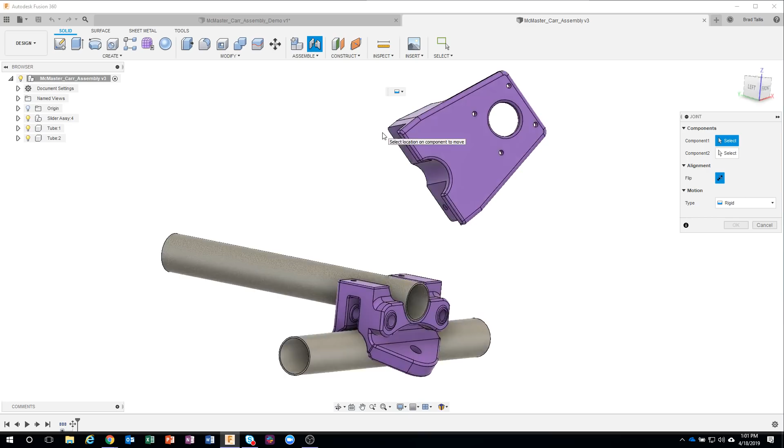So I'm going to go ahead and use the Assemble menu, and let's create a joint. I'm just going to zoom up and click on this edge here, and this circular edge right here.

Now I want to be really careful. You'll notice when I'm hovering over this edge, it's selecting the whole edge, but sometimes you'll get where there's an end point, and I do not want it to catch right there. I want it to catch in the center. So you'll notice that I've zoomed up on this area, and when you're positioning parts, I highly recommend that you zoom up so you can kind of see what's going on.

So I'm going to go ahead and click that edge, and it's going to bring that part and line up those holes. You'll notice that it's using a rigid motion type. It lined those up, but now I want to go ahead and line up this hole with this hole over here, so I'm going to go ahead and say okay.

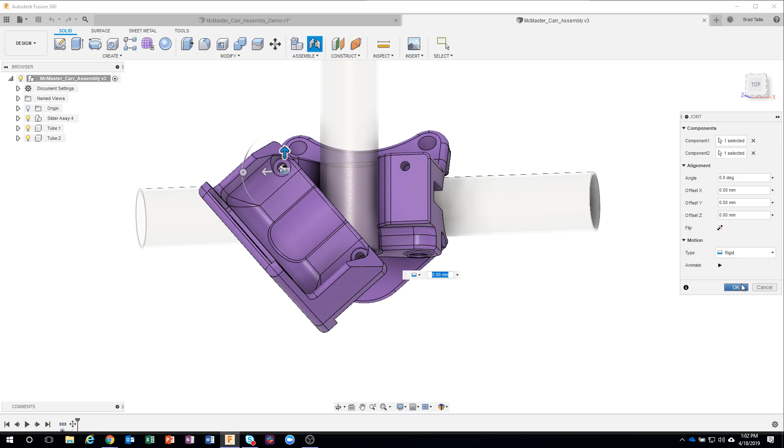We'll use the joint command again. This time I'm going to say this edge, again making sure I grab the correct edge right there, and then I'll go ahead and select this edge here. Now you'll notice I get a warning that says a joint already exists between the selected components. Do you want to continue?

This is what I really wanted to point out, because a lot of people think, oh, you can only have one joint, and that's not true. You can actually have more than one. So yes, I want to continue.

However, you'll see that it goes ahead and lines up that joint, but I get a warning that says the selected joint type would result in a conflict. I'm going to go ahead and say okay. Sure enough, you can see down in my timeline, here's my first joint that I created, the rigid joint, and then here's the second rigid joint, and it's highlighted yellow saying that it can't do that.

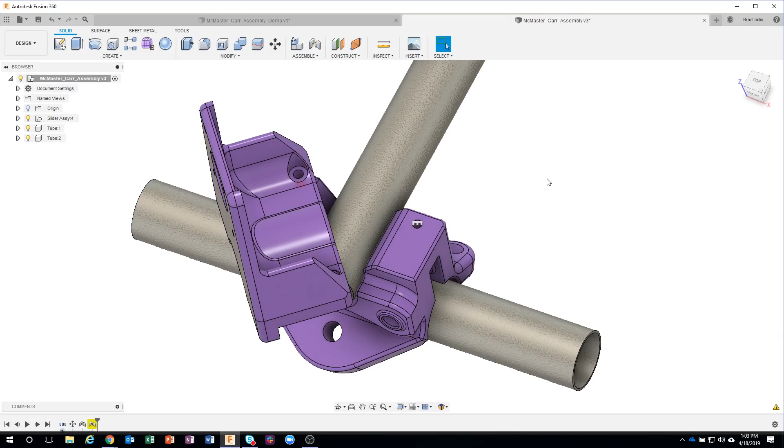So how do we go about positioning this correctly? Well, the issue is the fact that I'm using rigid joints, and if you look at this, if this is lined up right here, we basically want to rotate this part around to line up these other holes.

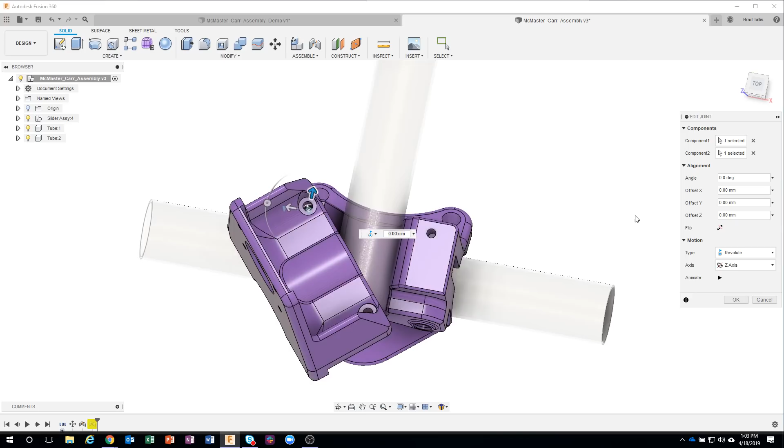So let's go back and edit this joint type, and instead of making it rigid, let's change it to revolute, and you'll see that it's going to revolve around that particular axis, and I'll say okay. Now it's still complaining at me, but it's now able to rotate around this hole.

Well, let's do the exact same thing over here. We want it to be able to rotate around that hole. So I'm going to come in here, and you can see when I edit this joint, it's kind of off at an angle, and it thinks, oh, I need to be rigid or glued in place or welded in place. Well, we want it to be able to rotate to get this hole to line up with the first hole. So instead of rigid, I'm going to change it to revolute.

We get the little preview, and now when I say okay, we can actually see that that worked. Now I know it was kind of different, but the key thing there is you can actually have more than one joint on a particular component.

Again, it kind of depends on what kind of joints you're doing, but in this case, the default was rigid and it was giving me some conflicts. So I went back and just made it so we could rotate that part to fit exactly on that other component. Hopefully this tip will help you in the future. I thought this was a good example to show. I know we're going to talk about McMaster-Carr parts, but I just wanted to go ahead and position that in the correct location.

Okay, so what we're going to do now is I want to show how this thing's going to get assembled. You can kind of see we've got some bearings, we've got some bolts, and we've got some nylock nuts on here. And instead of modeling these myself or going out and finding where to download them, maybe off of something like GrabCAD, we have built right into Fusion the ability to insert a McMaster-Carr component.

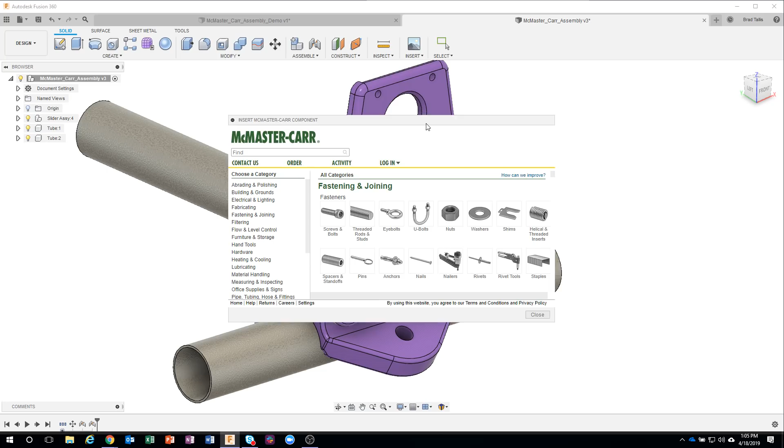So you'll notice I'm in the Insert menu right now, and in there is Insert McMaster-Carr. I'm going to go ahead and click on that. It brings up our McMaster-Carr window, and you can see all of the different categories. I'm going to make this a little bit larger, so I'm going to stretch this over.

So you can see screws and bolts, threaded rods, U-bolts, nuts and washers. I mean, there's pretty much anything you can think of in here.

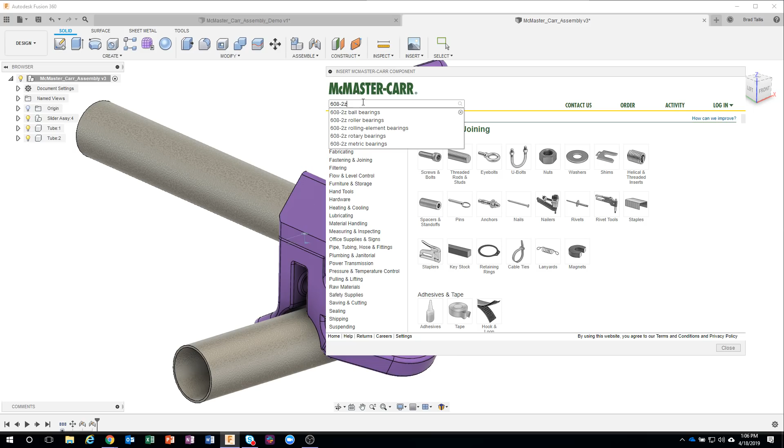So for example, I know that I need to use a 608-2Z, like a skateboard bearing, for this. So I'm going to do a search for 608-2Z. And sure enough, as I'm typing that in, you can see it comes up with a whole bunch of different options here. I'm just going to go ahead and hit enter.

And what it does, and this is my favorite part, you're going to see us use this section quite a bit, but it shows all of the different kinds of bearings that McMaster-Carr has. And there's quite a few of them.

So what I like to do is filter down the design. In my case, I want to use sealed bearings, so I'm going to click on sealed, and now you'll notice it's filtered those down. Then we can also see we have other options here, like precision ball bearings, stainless steel ball bearings, etc.

Now the thing you want to do is you'll notice, and it's kind of hard to see, but there's usually going to be a product number, and it's kind of highlighted in blue. So we can see this 5972. I'm just going to go ahead and click on that link.

And what this does is, if you see this little CAD symbol, that means that McMaster-Carr has a CAD drawing or a 3D model of this particular product. So I'm going to just click on that. Now I get a lot more information - what's the shaft diameter, the inner diameter, outer diameter, etc. So you can kind of see all of this information.

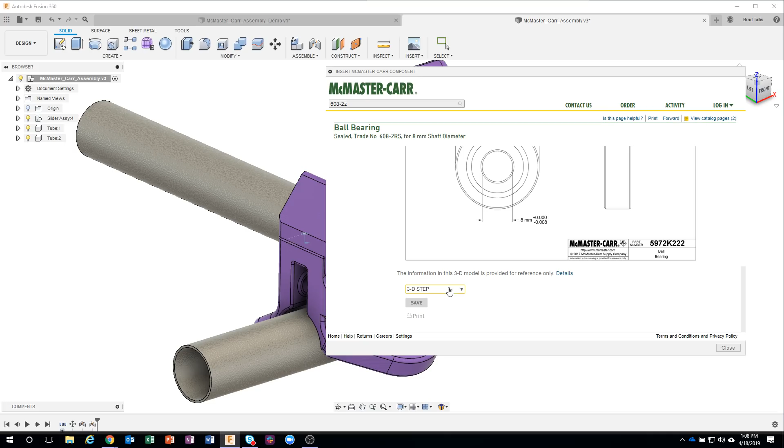But as I keep scrolling down, we're going to see the drawing for it. And then finally you'll see this little pull down. I'm going to scroll down a little bit more, and you can see that they have 3D models and 2D technical drawings.

And all you have to do is pick one of these options. Now, I personally like to use 3D Step, so I'm going to click on 3D Step and say Save.

Now, you'll notice how quickly it brought that into our session. This is an actual 3D model. If I zoom up on this - now I could have drawn this by hand, but it would have taken me some time, I'd have to research everything, etc. But here I'm able to just go to McMaster-Carr's webpage and bring it right in.

Now it came in a kind of an odd orientation. It's like horizontal and it's not where I want it to go, but I'm just going to go ahead and say OK.

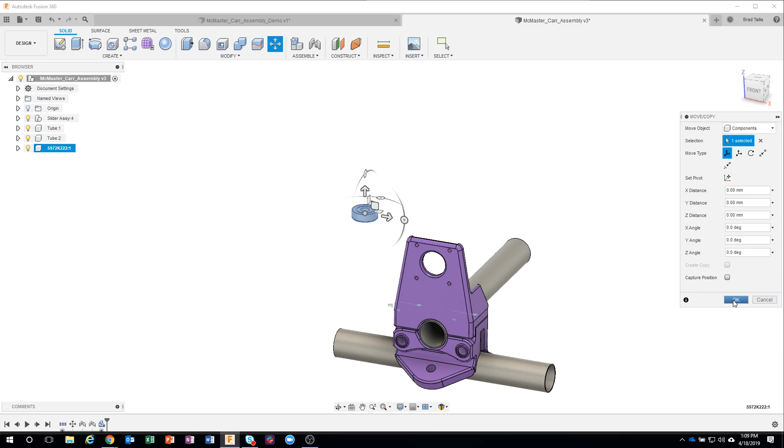Now I want this bearing to sit on this little bearing race right here, so I'm going to use the Assemble menu, and we're going to use the Joint command.

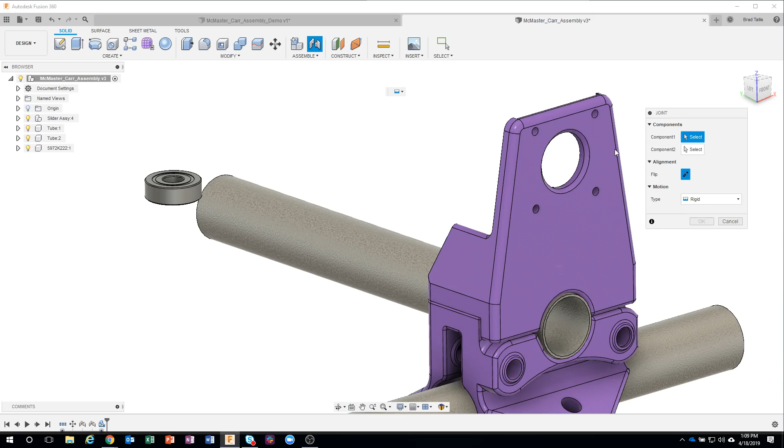I talk a lot about the difference between bodies and components, and one of the tips I use myself is which one's component 1 and which one's component 2. I've come up with a little saying that helps me: which one do I want to move, and where do I want to move it to. That's how I remember.

So this is the one I want to move, and I want to move it to over here. I'm going to zoom up here, and I'm just going to pick, for example, this edge. It can be any of these edges. So I'll click on that edge there. That's the one I want to move.

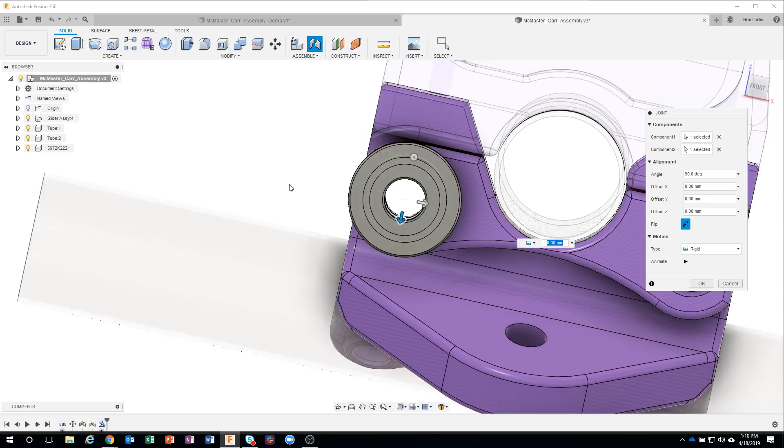And I want to move it to, for example, this edge here. It's going to move that bearing, and you'll see it positioned it exactly where I wanted it. It's axially lined up in the correct axis, and it's sitting on that particular little face. It's kind of hard to see through there.

Now, if for any reason it came in looking like this, where it positioned it in the right axis but it's clashing through the part, you can flip the orientation using this little flip icon right here. So I just used McMaster-Carr to bring in that bearing, and then I've positioned it where I want it on that part.

So the next thing I want to do is copy this because I want to put another bearing right inside of here. Now I could go into McMaster-Carr and search for it again, but I know this is the correct bearing. In fact, I could even come in here and rename this. I'll just call it bearing.

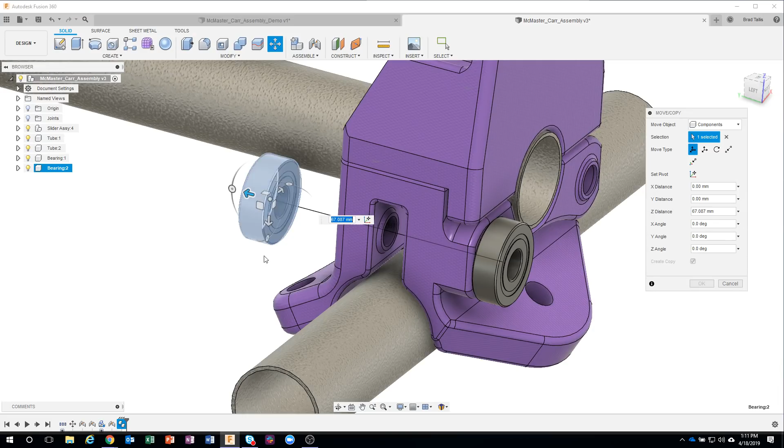Let's just say move copy. And when I do move copy, one of the first things I want to do is make sure I check create copy. Then I'm just going to drag this out in space somewhere. I don't really care where, I'm just getting it out of the way. And I'll say okay, I now have bearing 1 and bearing 2.

Let's go ahead and create a joint to put this in the correct location. I'm going to say that edge there and this edge here. Now again, notice I'm accidentally hovering over that edge and it's catching that point, and I do not want that. I'm going to move down the edge a little bit until I get the actual edge, and you can see that little smiley face in the middle.

That's what's called a joint origin, and it's going to line up the center of the bearing with the center of that one there. So we can see how it moved that bearing over, and it's now lined up axially.

I'll say okay. Now here's another thing: I could make these revolute and actually have them spin around, but you need to think about whether you're going to actually show that, or if this is just more like positioning. I just want to get this part from point A to point B, and that's where it's going to be. I could make it revolute, but in this case I'm just going to leave it rigid. I just want all of these things to move together. The cool thing is, if I make them rigid, I can always come back and change them to revolute if I need to. We'll say okay, and now I have that bearing there and that bearing there.

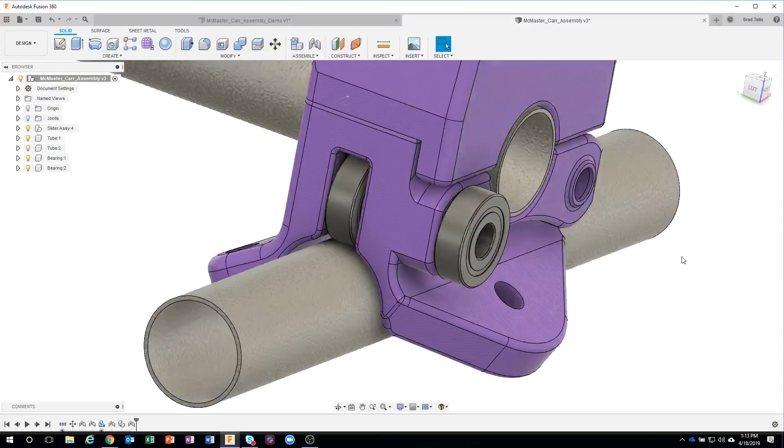Okay, so the next thing we want to do is somehow hold these bearings in place. So we're going to go out and search for a metric 8 by 60 bolt.

Okay, so let's come over here. We'll go back into the insert command and say insert McMaster-Carr component. I like to make this a little bit bigger just so I can see more of what's going on. So instead of typing in or searching for it, I'm going to go through this menu here. I'll click on screws and bolts, and you can see all the different options for the different kinds of screws and bolts. In this case, I'm going to do a hex head.

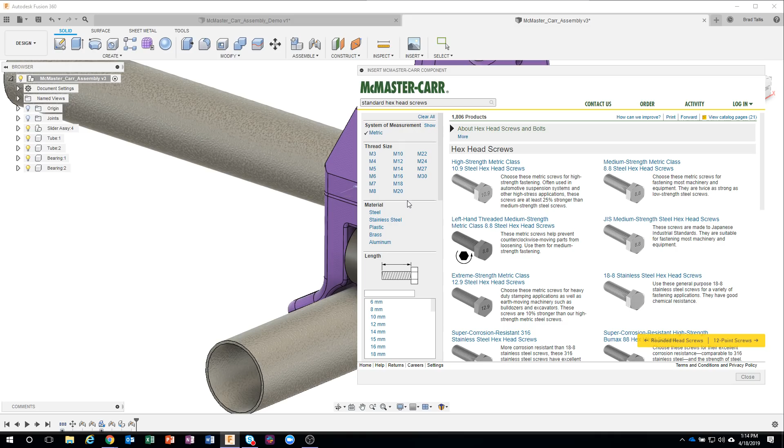And again, I think this is so cool. I said I want a metric 8, so I'll just start at the top and say I want metric, and it filters everything out, showing me all my options for the metric hex head screws. So let's pick metric 8, and now we're filtering for metric 8.

Maybe I want stainless steel. And I know the length I want, so I can drag this down a little bit, it's 60, so I'll say 60. Then you can also see we have the option of fully threaded or partially threaded, so I'll say partially threaded. It's literally filtered me down to one option. Instead of going through a whole bunch of tables, it's showing me here's a metric 8 stainless steel, 60 millimeter long, partially threaded hex head screw.

So again, I see this little CAD symbol, I can click on that. Just like before, it shows a drawing, a little rendering of it. It remembers my last option, which was step. So I'm just going to click on save.

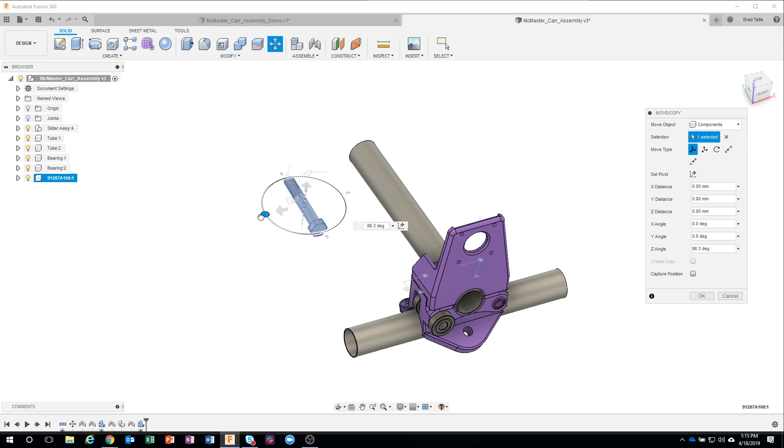It takes a moment to come in, and again it puts it up in space somewhere. Now if you want to, you could rotate it so it's more in the direction you want. In fact, I'll go ahead and do that just for fun. Then maybe I could even position it closer to where it needs to go. However, we're going to use the joint command to make sure it gets put in the exact correct location, but you can drag it around if you want to. So I'll just say OK, and there we are.

So let's go ahead, I'm going to capture my position and create a joint.

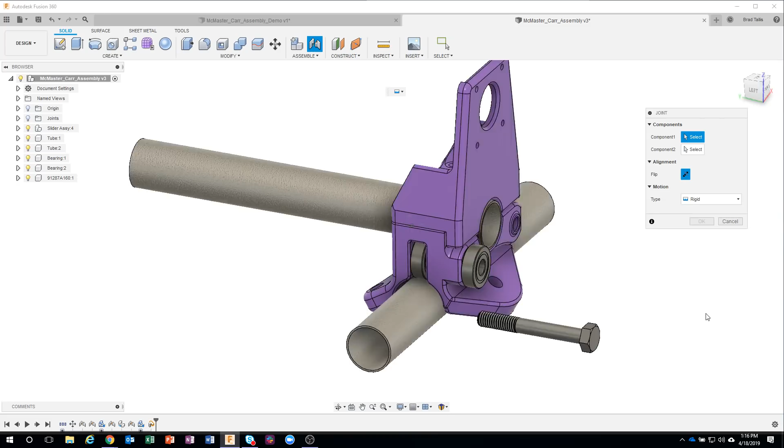So I'm going to zoom up on this head right here, and you're going to see a couple options. If I hover over this face, you'll see a lot of these little tick marks - round ones for the ends of a line, triangular ones for the middle of a line. It's kind of hard to not move my mouse because it wants to snap to it, but you can see the triangles in the middle. And then you'll see a little plus symbol in the very center of the shaft of the bolt - that's the exact center of that axis. So that's if I hover over this face.

If I get near this edge, you'll see it automatically snaps to the center of that edge. I personally like to use this one because to me it's confirmation that it's actually grabbing the center of that edge, and we also know that edge is planar on that face. So it's basically grabbing the center of that and the center of that plane.

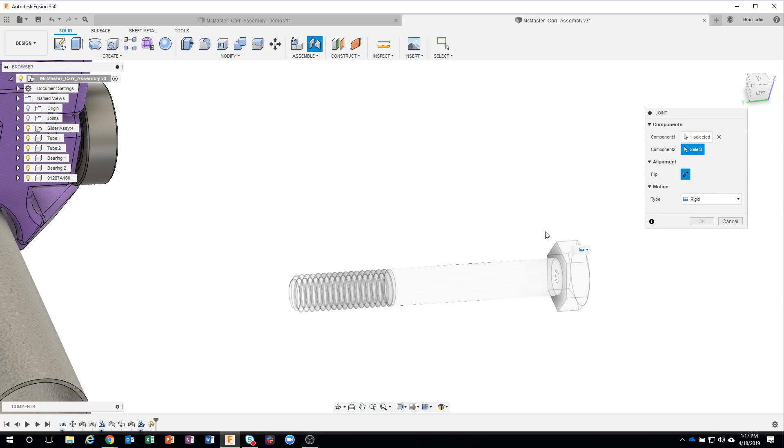So this is the one I want to move. And where do I want to move it to? Well, I want to move it to this bearing over here. So again, I'm going to hover over that edge and click, and it's going to move that bolt into the correct location.

Again, I could hit play. You can see it's showing that it's rigid in this case. Pretty much like I said before, I'm going to leave everything rigid for now. So we just positioned that screw where it needs to be.

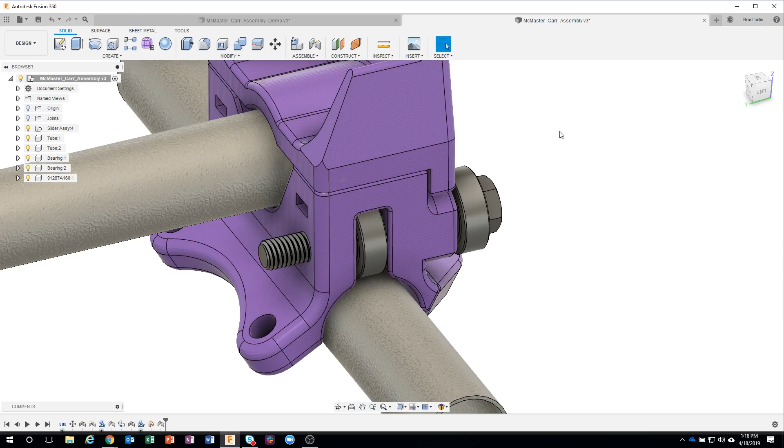Okay, so the next thing I want to do is put one of those nylock nuts on the back. So again, I'll come into the Insert McMaster-Carr component. I'll stretch this out a little bit, and this time I'm going to click on the nut icon. I want to do some kind of a lock nut, so I'll click on lock nut. But again, notice all the different options in here - you should hardly ever have to draw anything hardware related. I would definitely come out to McMaster-Carr first and see if it's in there.

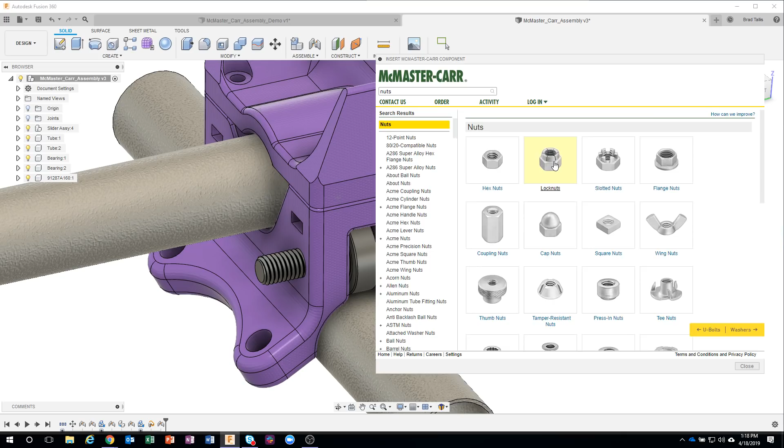So I'm going to click on lock nuts, and again I have some different types here. So I'm going to do this lock nut. I know I want a metric 8, so I'll filter through and say metric 8.

I'm going to go ahead and keep it stainless steel. So let's do the stainless steel, and you can kind of see it filters it out. It gives me a couple different options here, but I'll just use this very first one. I'll click on this little link. I see the little CAD icon, so I can click on that product detail. It shows me everything I want to know about it, which is kind of nice. And I'll click on save.

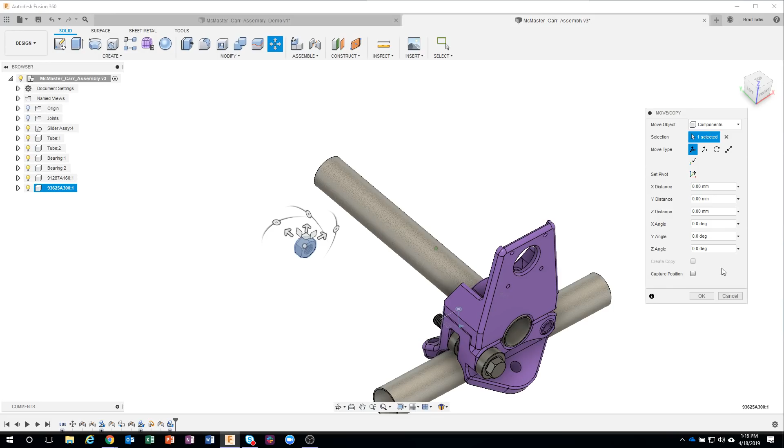Now, last time I kind of moved it around. This time I'm just going to leave it. I'm just going to go ahead and say OK, and it's just out there in space.

And we'll do the joint command again. So I'll say joint, and I'm going to zoom up a little bit. Now here you'll notice, because this is kind of threaded, it kind of cuts the circle in half. Now it's still showing me the center of that circle, but in this case I'm going to hover over this face, and you can see all of the options that it's giving me.

So I can catch to these midpoints if I want to, but I can also catch to this particular little plus symbol. Now, I covered this again in my parts and assemblies live stream that I did, which we'll link to. But as you're moving around, you'll see it's going to try and snap to all these other faces and edges, and it can get really confusing really quick.

Okay, so here's a tip. You hover over what you want, and you want to control your selection. So on a PC, I'm just going to hold down my control key. And now when I move my mouse, you'll notice it's not catching any other edges or faces because I'm controlling my selection. As soon as I let go of control, you can see it's back to trying to snap to everything else. But if I hover over what I want and hold down control, I'm now controlling my selection. So I can very easily click on that little icon.

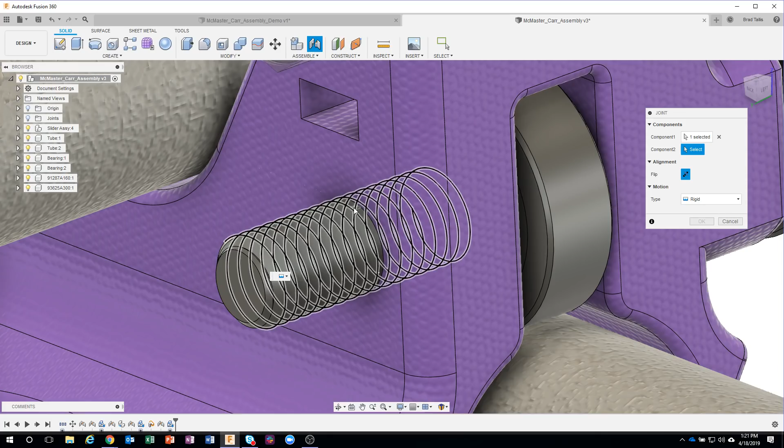And I'll come over here, and I'm going to zoom up again. Now here's another thing. You'll notice I could hover over this face and catch to that little center. I could hover over this edge and catch to the center. But I need to be really careful because if I start to move, I'm going to get a bunch of other things. So again, I really like the fact that I can hold down my control key to control my selection. So I'm going to click that little icon, and it's going to move the nut in place. I'll say OK, and we've now created basically this subassembly.

Now, if I go ahead and try and move this bearing, you'll see that the whole thing moves because we basically attached it, made it rigid with this purple part. And that's going to come into play here in just a moment.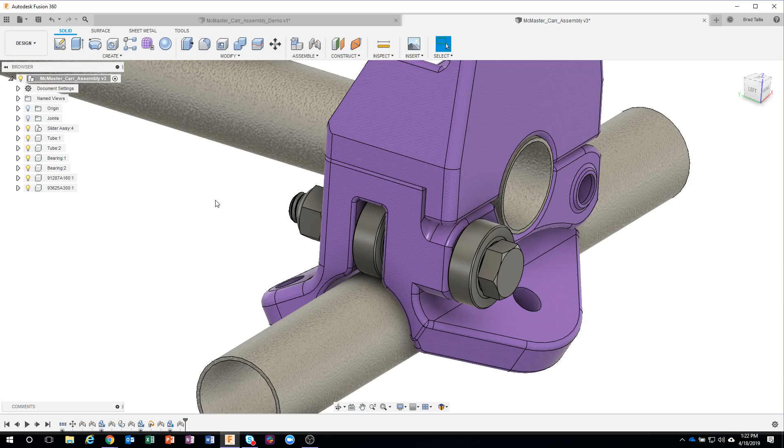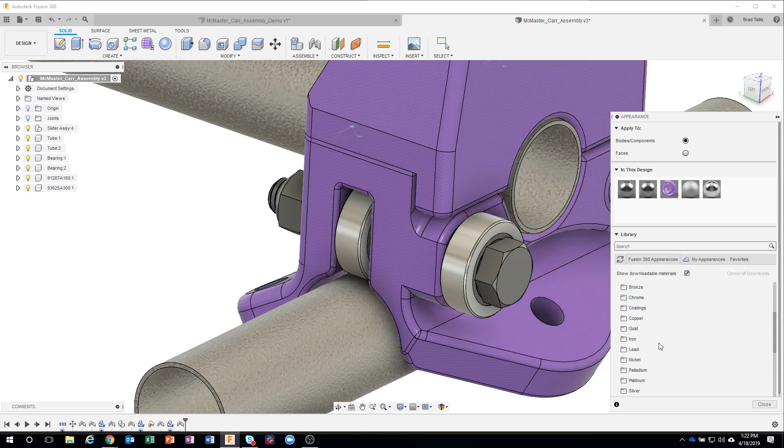I like to change the appearance, so let's go ahead and hit A for appearance, and let's make these aluminum bearings. I'm just going to drag aluminum onto the bearing. You can kind of see what that looks like. Maybe we want to do stainless steel because that's what we picked, so I'm going to say stainless. And then we could do maybe a polished stainless steel if you want to, or a satin—it's really up to you. But I went ahead and just added some appearance to that to make it look a little bit more realistic. In fact, you can kind of see the galvanized pipe that I'm using.

Okay, now I need to do the exact same thing over here. Well, let's save some time—instead of bringing everything back in again, we're going to reuse this. And to do that, I want to organize this basically into a subassembly.

So you can see that we have this bearing, we have another bearing, and then I'm just going to rename this metric 8_60 bolt, so we kind of know what that is. And then we know that this is a metric 8 nut, let's just say. Again, I could have left the part numbers in there if I wanted to, but I like to rename these so I can kind of see what they look like, what they are.

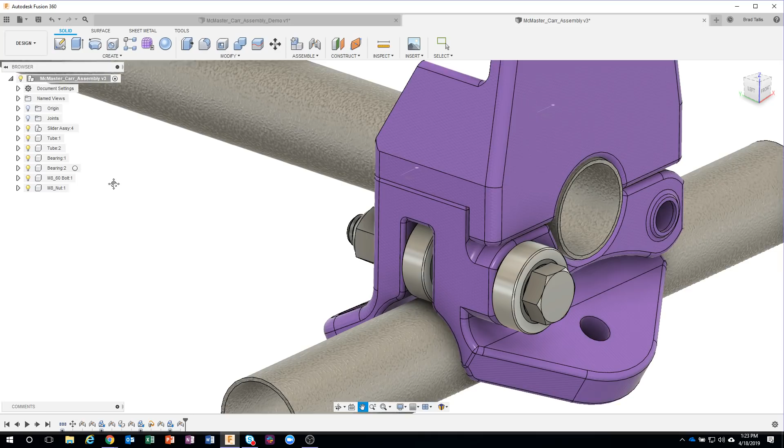Okay, here's a neat little trick. We can see I'm at my top level assembly right now. I'm just going to right mouse click and say new component, and it's going to create a new component underneath that. And I can rename this—in fact, I'm going to call this bearing assembly.

Let's just call it bearing assembly. I'm going to drag this bearing, the second bearing, the nut, and the bolt into that bearing assembly. Now you'll notice the icons changed a little bit, showing that there are multiple components underneath this bearing assembly.

Hopefully that makes sense. I'm going to come back to my top level assembly and activate that just by hitting that little radio button. Now I can right click on bearing assembly and say move copy.

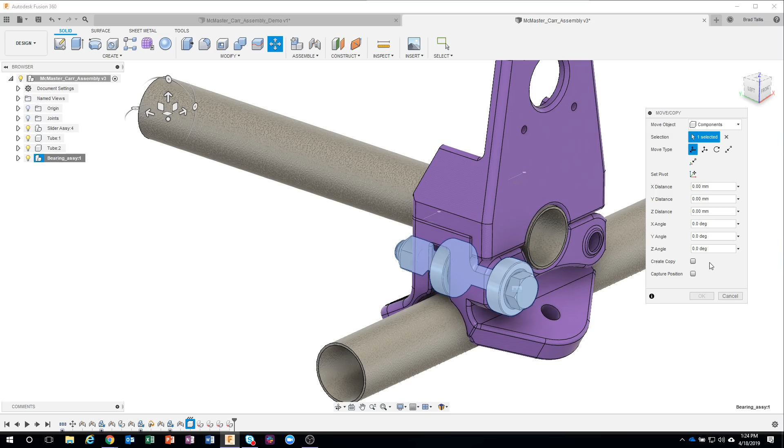The first thing I want to do is click on create copy. I'm emphasizing that because if I start to move, it assumes you don't want to copy it and just want to move it, and it grays this out. So I'll go ahead and say create a copy, and just drag it to the right some random distance, then say OK.

Now we'll see that we have bearing 1 assembly and bearing 2 assembly. But if I grab that bearing, you'll notice I'm able to move it away. That's because when we were putting these bearings in place, remember my saying: which is the one you want to move, and where do you want to move it to? We were moving it to edges on this purple part, so over here it doesn't know which edge. These are all individual - you can see the nut and that particular bearing aren't moving with it.

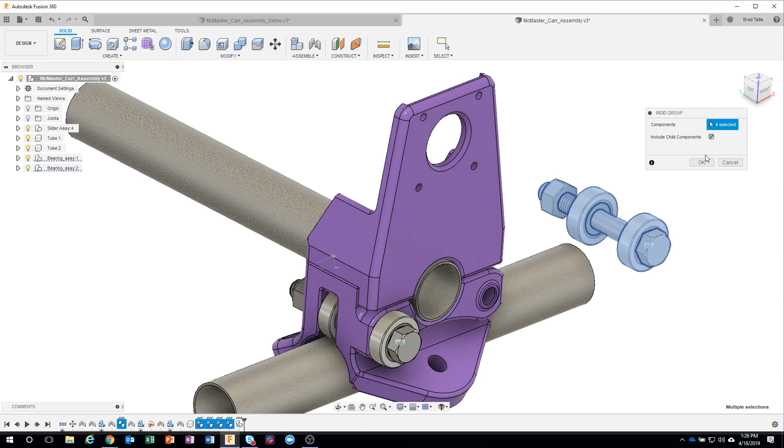So here's another trick I do. I come in and say I want to move all of these as a rigid group - if one of them moves, I want all of them to move. You'll notice it says constrain selected components, do I want to continue? I'll say yes, and select all 4 of these components, then say OK. Now if I move that bearing or the nut, they all move together.

If I were to position them using, for example, the joint command - which one do I want to move? I'll pick on this edge of this bearing. Then where do I want to move it to? I want to move it to this edge here. Now you'll see something interesting happen. I'm going to zoom out - you'll see that just the bearing has moved. That's because we're only dealing with 2 components at a time.

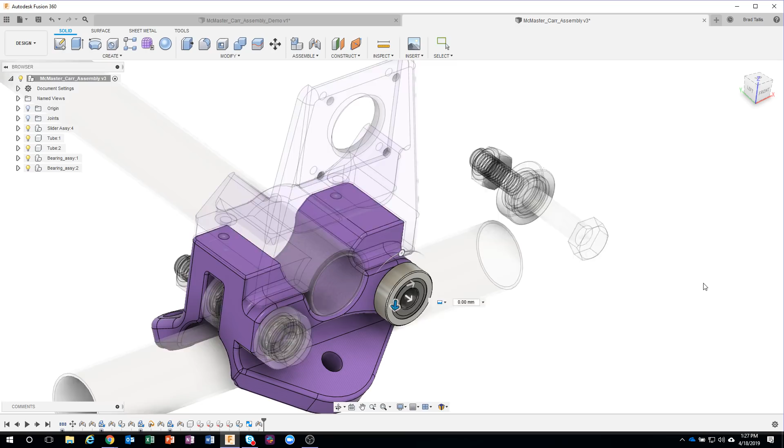Which one do you want to move? Where do you want to move it to? But as soon as I say OK, those other joints that know they have to be rigid together as a group - remember we did that rigid group - know they have to stay together, so it moves all of them at the same time. That kind of freaks some people out sometimes when they group everything together and then go to position it and only one part moves. As soon as you say OK, everything updates accordingly.

So we've quickly created these 2 little sub-assemblies for rolling on top of this pipe. Now we have kind of the same thing underneath - we have location for 3 bearings, but we're going to use shorter bolts because we don't have to go quite as far this time. So let's expand open and pick one of these bearings.

I'm going to grab that bearing and say move copy. Go ahead and click on create copy and let's just move it down. Oops, didn't mean to do that, sorry. Let me click on bearing, I'll say move copy.

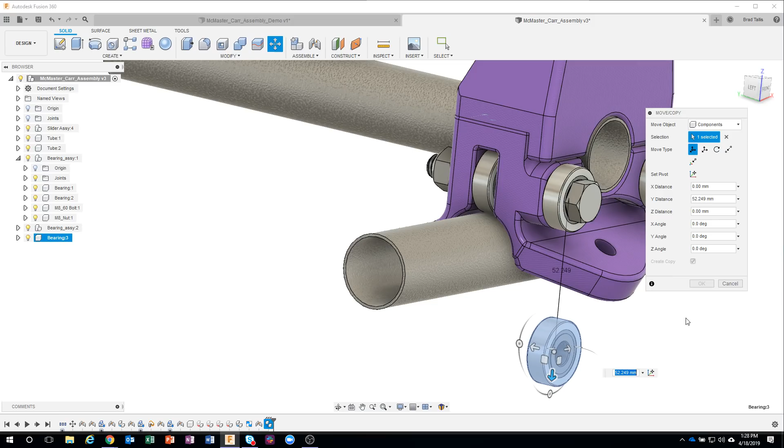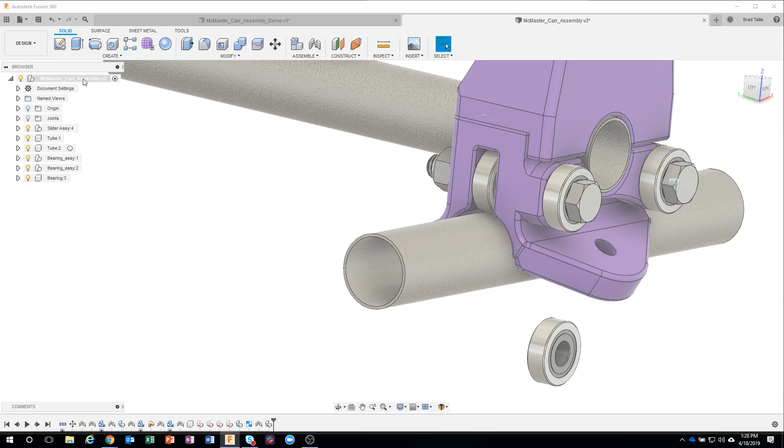Grab the arrow, drag it down a little bit, and click OK. You'll see it creates its own little bearing right here. If I hover over it, you can see it changing color on the screen a bit, because this is my active component, it put it underneath that particular component at that level. I'll put it where I need it to go. I'll say joint, zoom up here a little bit, make sure I grab that edge, and it places it where it needs to go.

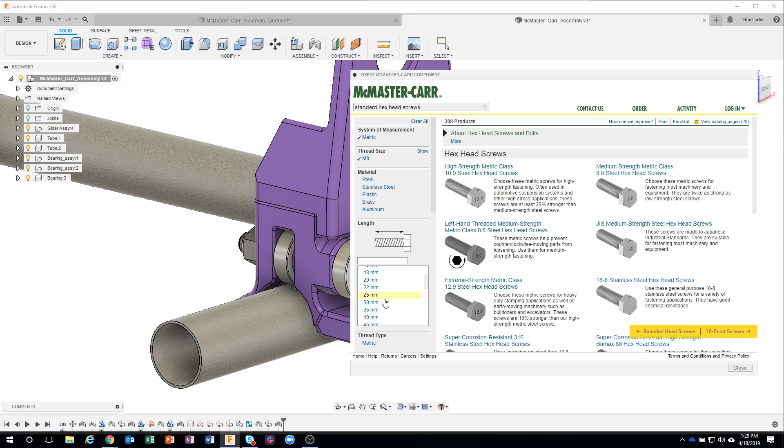Next I need to grab a bolt or a screw, so I'll insert from McMaster-Carr. I wish it remembered the overall size, but it just goes to a default. I'll click on the hex head screw, metric. We know we want a metric 8, but this time I want the length to be 30, and I want it fully threaded. Now I can see all the different options, so let's use a stainless steel hex head.

Here it shows a couple different options: coarse or fine, fully threaded. I'll go ahead and do a coarse thread. I'll click on that number, product detail, save, and it brings it into my session.

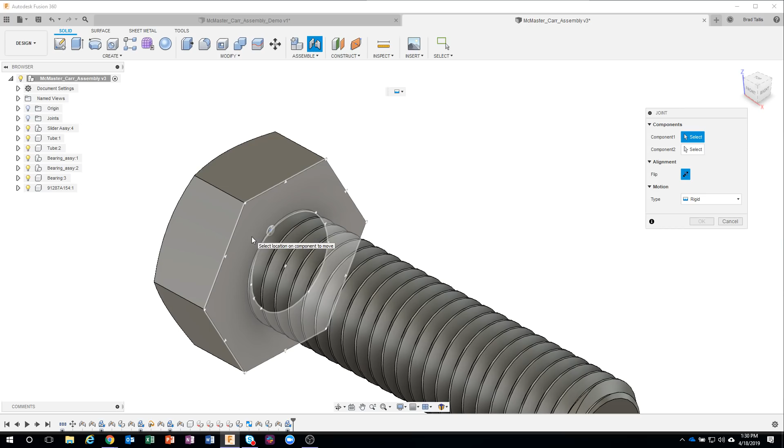Let's do the joint command again. Now because there are edges and threads and stuff, I'll hover over this face, hold down my control key to control my selection, and grab that little plus symbol in the middle. I'll move away from it so you can see it — that shows the center of an axis. I'll grab that and position it where I want, staying zoomed out so you can watch it move. I'll click on that edge, and you can see how it rotates and brings it into place.

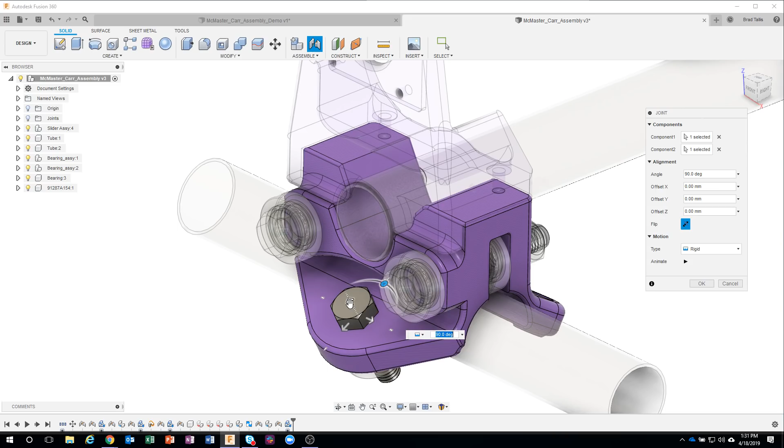I'll say OK. Now here's another cool trick — you'll notice there are options here. I could actually grab this and rotate the whole bolt if needed, since it comes in at a default angle like 0 or 90. I could also offset it a very particular distance once it's located, if needed. In this case we're not going to. I'll say OK, and now I have the bearing and the screw in place.

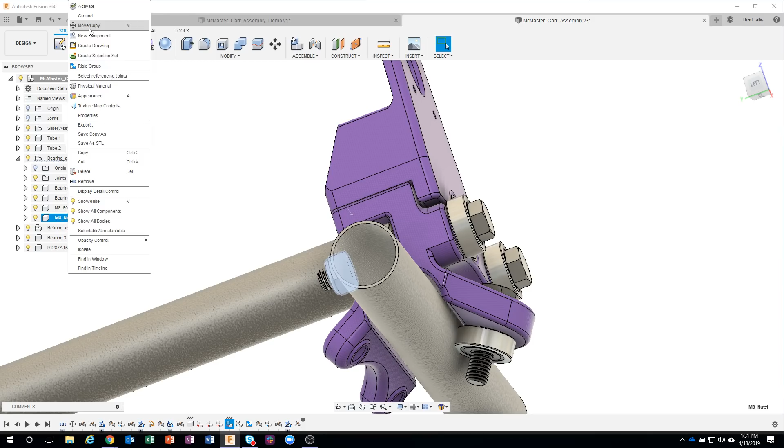I know that's a metric 8, so let's use one of the nuts again. I'll right click on it, move copy, create copy, and drag it out away from everything like so. There we can see it. We'll use the joint command again — a lot of this is repetitive, but you'll see how quickly we can build this up. I'll hover over, grab that center point, and it puts the nut right where we need it to be. I'll say OK, and we basically have that little subassembly.

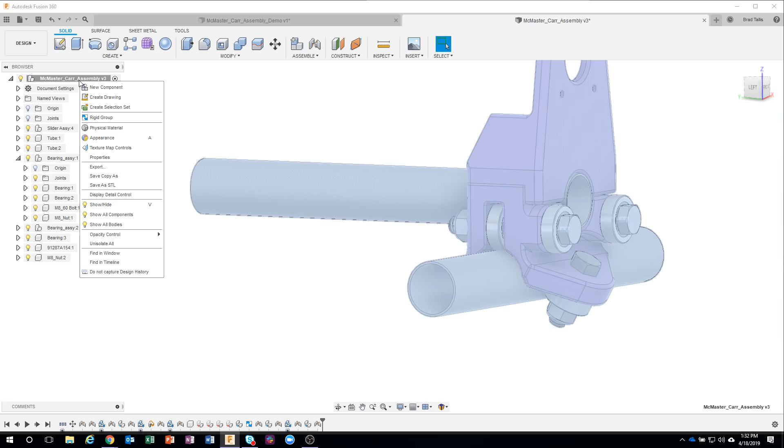I want to put it in two more locations, so just like before I could create another subassembly. I'll say new component and call this bearing assembly short or something like that. I'll grab these three parts, make sure I grab those guys, drag it down, and now I have this bearing assembly short.

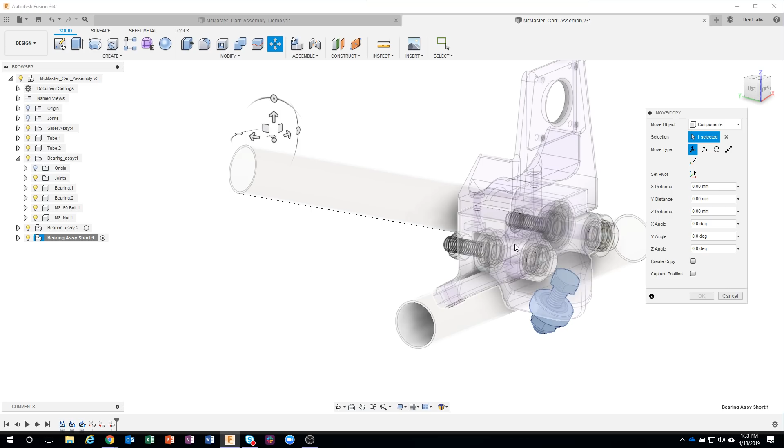Now I'm going to purposely make a mistake here. I'll say move copy, turn on create copy, and you'll notice it sits for a bit and comes up with a warning: the selection cannot be copied because it contains the active component. What does that mean? This is my active component, and I'm trying to copy that — so that's what the warning means. What I need to do is go up a level, activate the top level component. Now when I come in here and say move copy, create copy, I don't get that warning message.

You can kind of think of it almost like a parent or child relationship. A child can't copy a child, you have to have the parent's permission to do that, right? So the parent is going to be the active component. Okay, so I got that where I want it to be. I'll say OK.

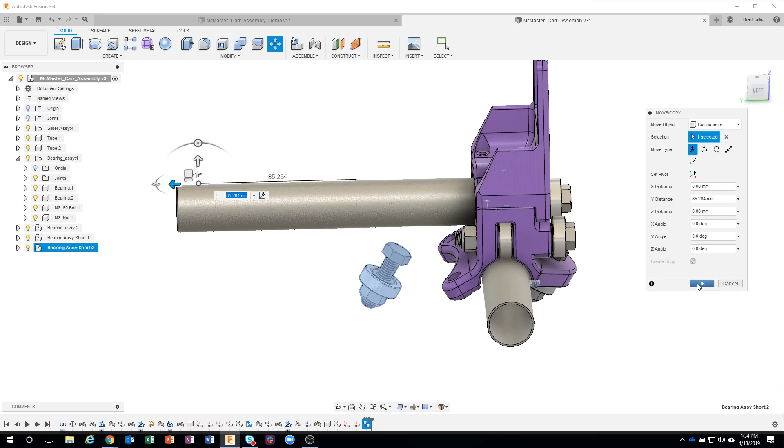I might try moving this around, and sure enough, I can see that those are not connected. So let's go ahead and just do a quick rigid group. I'll select all 3 of those. I might get the message saying that it constrains selected components, and that's probably because of this include child components. I'm just going to leave that alone for now. I'll say yes, and OK. Now they're all grouped together.

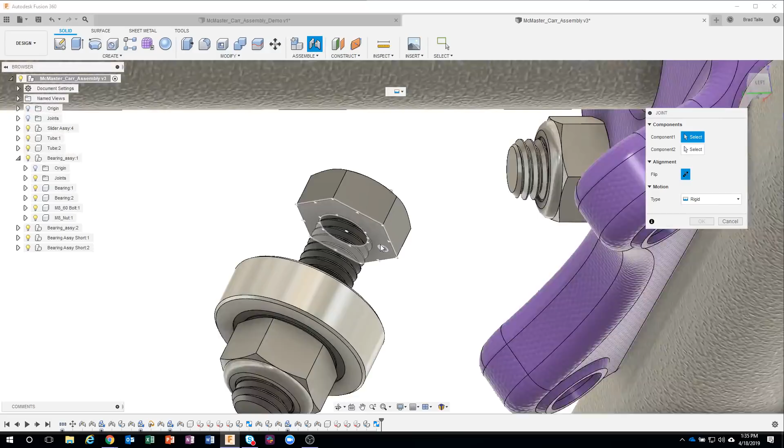We'll do the joint command. Now I'm gonna basically put the face of this bolt on the face of this purple part here. So I'm gonna kind of zoom up, control my selection so I can grab that guy there. Control my selection and grab that guy there. And again, you'll notice it's just moving one of those parts, but as soon as I say okay, the other ones have to update accordingly.

And then we'll do that one more time. My top level assembly is active, so I should be able to come in here and say move copy. If I knew the distance, I could go from point to point. In fact, this is kind of cool. I'm going to go ahead and turn off that bearing assembly, and in here I'm going to say create copy. I have the option to translate, rotate, and also go from point to point.

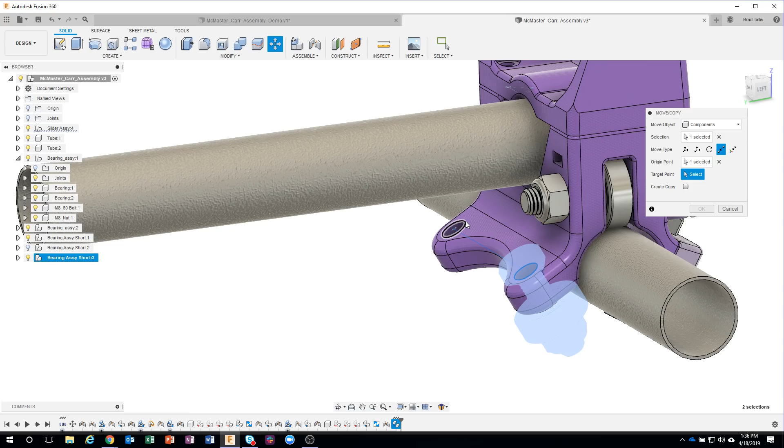So I could say, what's my origin point? I'm going to grab that guy. What's my destination or my target point? I'm going to grab that guy. We'll say okay. Now they're both turned off, so let me turn them back on.

Instead of having to move them out into space and then use the joint command, I was able to move them over. However, we didn't use the joint command, right? So this doesn't know that it's supposed to stay rigid with the purple part. So I personally like to use the joint command, okay? So I'm going to undo back.

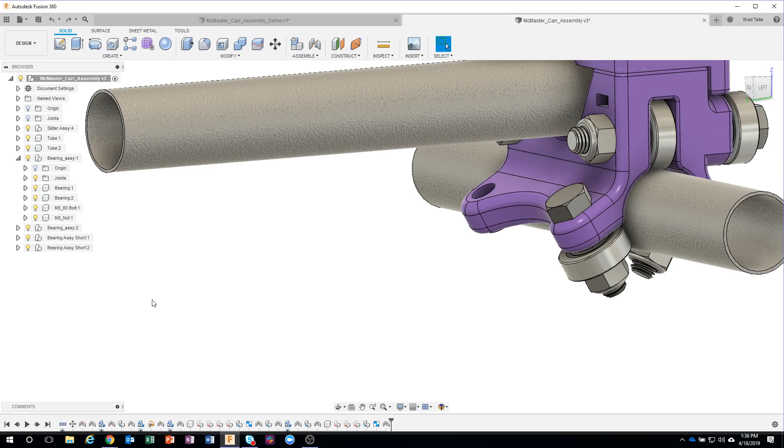We're back here. I'll come in and say move copy, and I'm just going to drag this guy out a little bit, like so. If I were to test this, you can see that it's a rigid group, so I know that that's correct.

And then finally I can come in and say okay, I want to create a joint that goes from, let me rotate a little bit more so you can kind of see it, the center of the screw to the center of this location. And I'll say okay. So, quick review there.

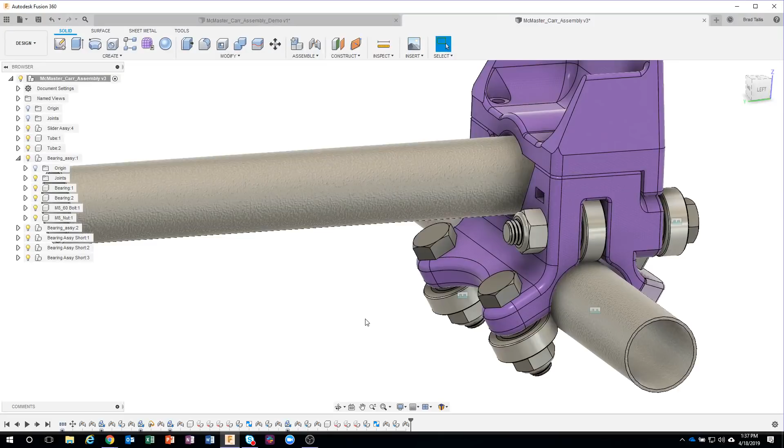I showed how you could create a copy and then just move it to a location, and then I said that's not the best method. I mean, if you don't care about joints or having things move together, that would work. But in this case, we want that whole assembly to move together. So I want to make sure I'm using the joints command. That's why we did that section twice. Okay, I've got that whole area.

Now, let's say we want to simulate how this is going to move. So I'm going to go ahead and grab this, and we can kind of see how I'm able to kind of just freely move that around. Well, I obviously want to keep this pipe in the correct location, and I want it to slide in the correct orientation. So, because this pipe is basically clamped into place, I'm just going to come in here and say rigid group. I'll say this pipe and this purple part have to move together. So now if I grab that purple part, you'll see that that pipe moves with it.

It's a really quick way of doing that. Instead of having to do a joint and say the edge of this is touching the edge of this or whatever, if it's already in the correct location and they move together, just make them a rigid group. Okay, the next thing I want to do is to make it slide back and forth.

So I'm going to use a cool command called As-built Joint. Because these parts are already where they need to be, I can use this as-built joint. What's the component? I'm going to say this part here, and I want it to slide along the pipe, so I'll go ahead and click on the pipe also.

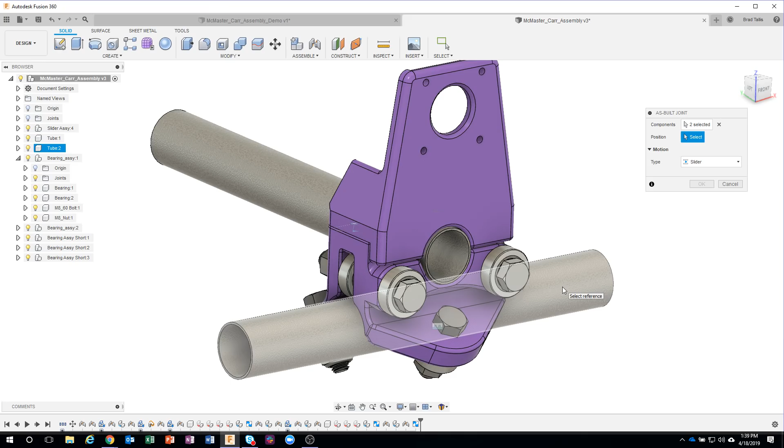Now it's asking for a position, and it's kind of hard to see, but as I move my mouse, you can see this little slider icon. I have the option to specify an endpoint, a midpoint, or an endpoint. In this case, I'm just going to grab this midpoint, and that's basically going to be our 0,0. I'll click there, and we can see how it slides to the left and to the right, and returns to that midpoint.

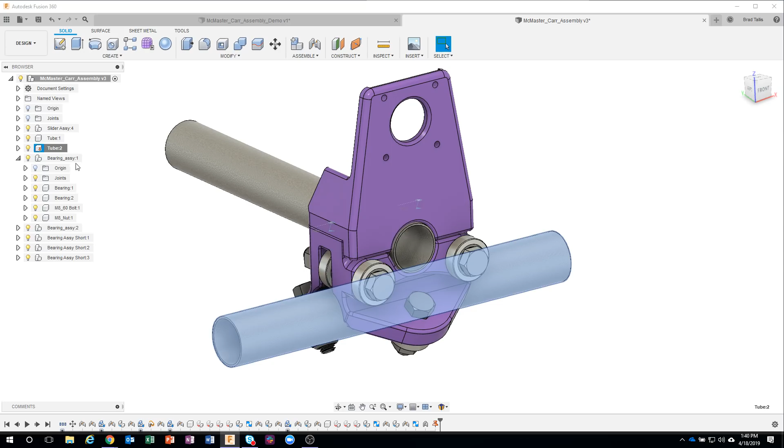So I'm going to right mouse click on that and ground it. You'll see a little pin icon appear on that tube right next to my cursor. That basically means I can no longer move this pipe. If I try to click and drag on it, it's physically grounded in place. But if I grab this guy, I can now slide back and forth. We can kind of simulate how that would work and how it would look.

I'll go ahead and revert it back. So I think that's kind of cool, we can actually simulate how this thing's going to look and how it's going to work. And again, this is just a sub-assembly. If I had it on the other side, it would move also, etc.

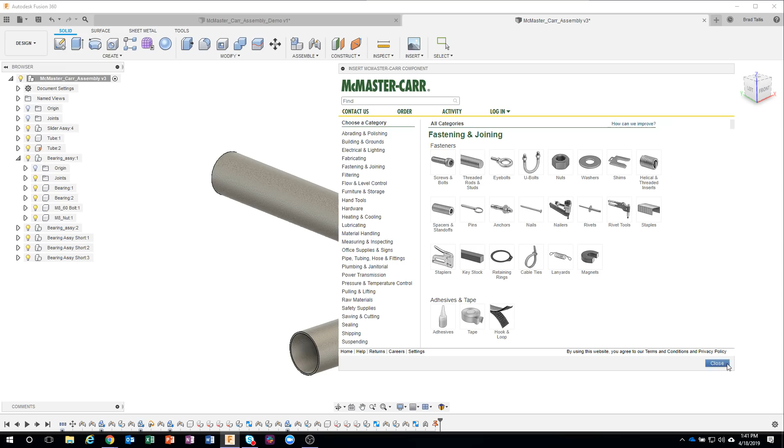Okay, so the last thing we're going to do with this assembly is bring in a stepper motor. Now, I could go out to GrabCAD, or maybe a manufacturer's site to look for a stepper motor, but believe it or not, McMaster-Carr actually has them also. So I'm going to come in here and say Insert McMaster-Carr component, and I'll start to type stepper in the search window.

Sure enough, you can see there's stepper motors. So I'll go ahead and click on stepper motors. I want to do a NEMA 17, so I'll filter out to the NEMA 17s. I'll make this a little bit larger so we can see what's going on here. And here you can see all of the different options.

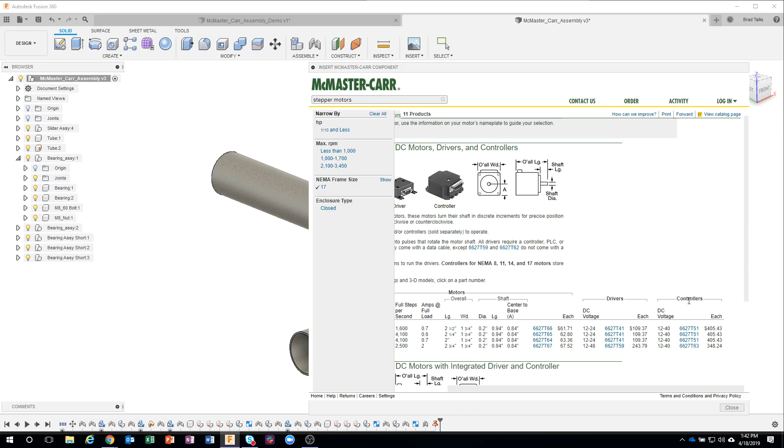We've got motors, drivers, controllers, with integrated drivers and controllers. But in this case, we're going to just do, I'll go ahead and do the largest one here. You can see it's actually broken down - there's multiple links. This one is for the motor, this one is for the driver, and this one is for the controller. So I want to make sure I'm grabbing the right one - I'm going to grab the motor and click on that one.

Product detail, and again, it gives me all of the information about this particular stepper motor - dimensions, etc. I'm going to just say save, and we'll bring it in. So there it is.

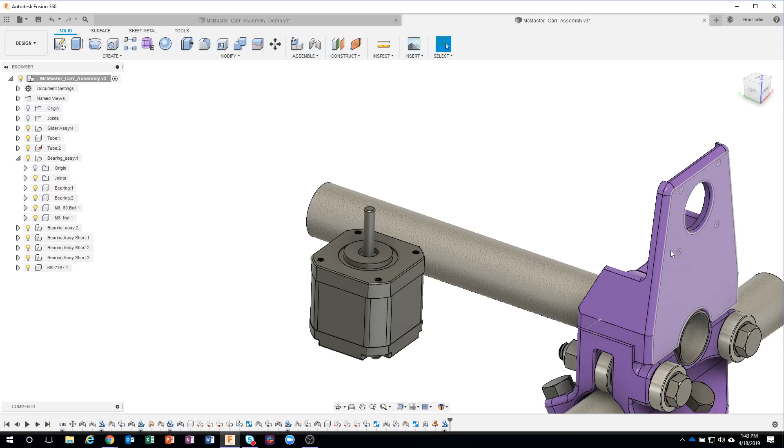So I'm going to just leave it where it is for now. I'll say OK, and as we rotate, you'll notice there's a plug-in at the top. Or actually, I want to make this be the top of the stepper motor. Now, I already have some holes here, hopefully they'll line up, so I'm going to come in here and say let's create a joint.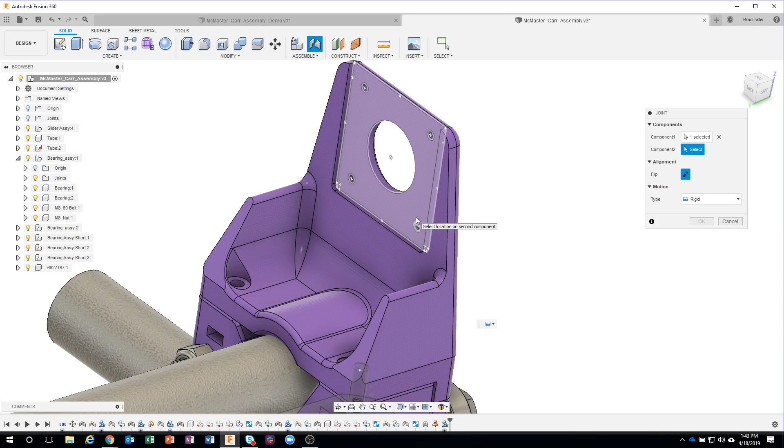I'm just going to pick maybe this lower left corner. I'm going to hold down my control key, grab the center of that hole, and then I want to make sure I grab the same circle over here, this lower left one. So I'll click on that, and we'll see it's going to position our stepper motor in place, and our plug-in is at the top.

And sure enough, it looks like the holes are lined up. We can verify that using a section analysis, but I'm going to go ahead and say OK. And we just brought in a stepper motor. I didn't have to model it. It's even almost like a sub-assembly, with screws. Let's expand this open and take a look - it actually has two separate bodies, so you can see that the shaft is separate from the body, if need be.

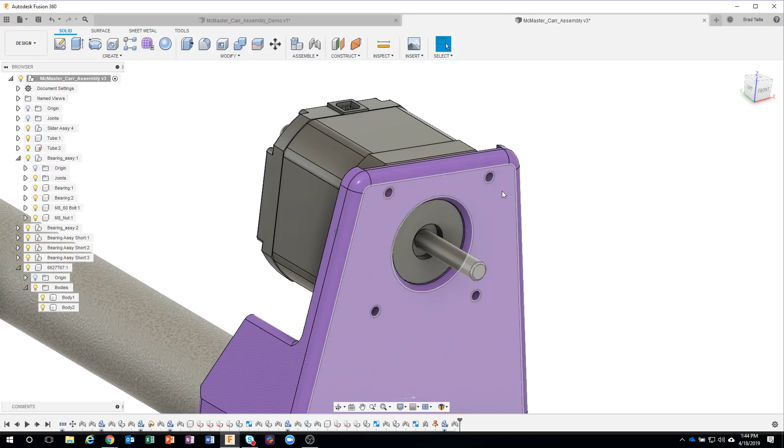Okay, now we need to somehow mount this in place, and this time I want to use some washers. So let's go ahead and insert and search for some washers. I'll click on washers and see all of the different options, and we'll click on flat, metric.

Now, I'm not sure what size holes these are, so let me just go ahead and inspect one of these. So it's a diameter of 3.2, so we can guess that it's going to be a metric 3.

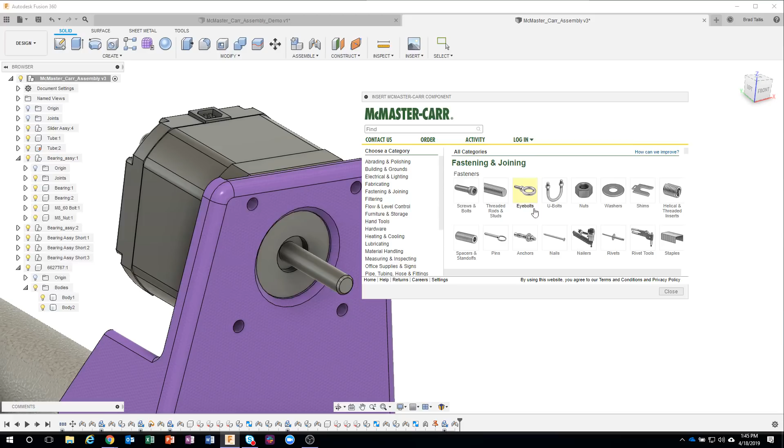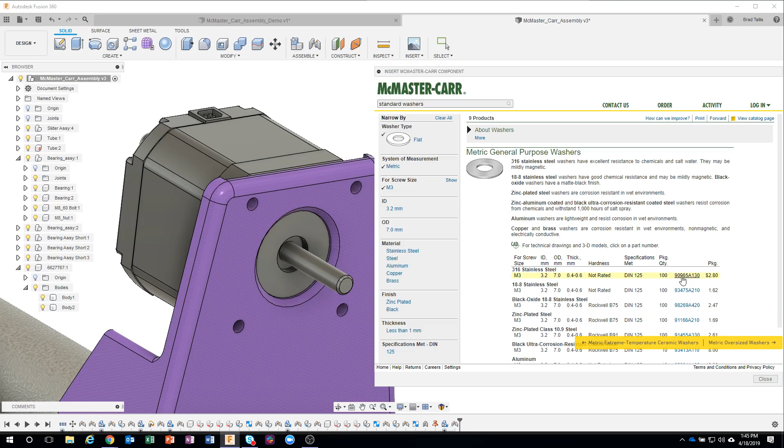So I'll do that again. I'll come in here and drag this down: washers, flat, metric 3. And again, I still have more options here - inner diameter, outer diameter, what material it's made out of. I'm just going to pick the general purpose one, stainless steel. So let's just do, for example, this guy here. Product detail, and save.

Okay, all I have to do again is use the joint command. So I'm just going to get near one of those edges, and near that edge there. And here's the example I was talking about earlier - I was hoping this was going to happen. So it put it in the correct location, but it's sunk inside the part, so here's where I just have to hit that little flip icon to flip the orientation.

I'll say OK, and I want to put this in these 4 other locations. Now, I could create a sub-assembly like I did before, but I'm going to show another method - in this case, we're actually going to create a pattern. So let's go ahead and rename this guy - I'm just going to call this M3 washer, so I know what it is.

I'm going to rename this guy stepper, NEMA 17 or something like that. Again, I like to kind of rename my parts and organize my browser here so things make more sense.

So what I'm going to do now is use the create pattern, and even though this is kind of funny - even though it looks like a rectangular pattern - I'm going to do a circular pattern. The reason for this is because it's actually easier. I only have to specify one axis, where a rectangular pattern you have to say go a certain distance to the left, a certain distance down. Well, I'm going to say circular pattern.

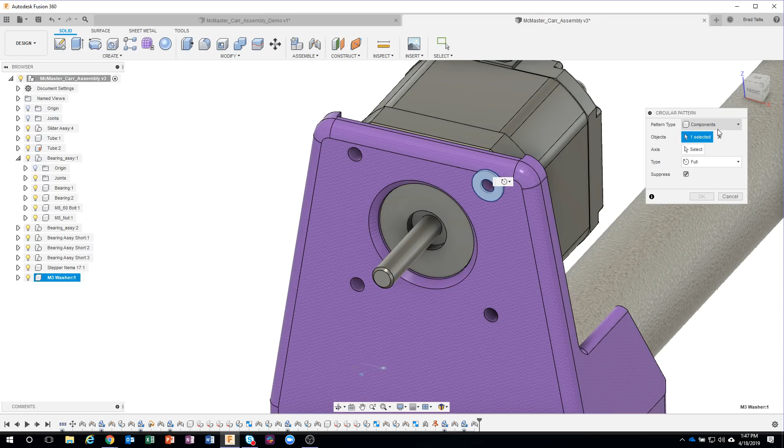We'll click on the washer as our component. What's the axis? I'll go ahead and click on one of those circular edges there, and you can see that it's going to pattern those washers. But right now it's doing a quantity of 3. As soon as I go to a quantity of 4, you'll see that it actually lines those up. I mean, I could keep going, right, but 4 makes sense, so I'm going to go ahead and say OK. And we just patterned those washers around.

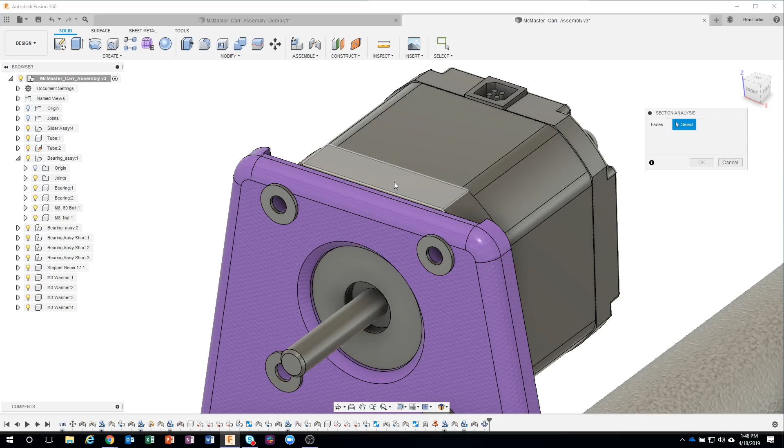Okay, so the next thing I want to do is put a metric 3 hex head screw through here, but I need to know the correct depth. So here's a neat little tip - in fact, I'm going to go ahead and do a section analysis. I'm going to slice down through my design, and we can see how deep this screw hole goes.

Okay, so what I'm going to do is measure. I'm going to just click on my measure, and I want to know how deep it is from the front of this washer. So I'm going to click on that front face of the washer, and then I'm just going to click on the back face there, and it's telling me that the distance is about 8.41. So I know I could probably use a length of 8 millimeters for the length of the screw.

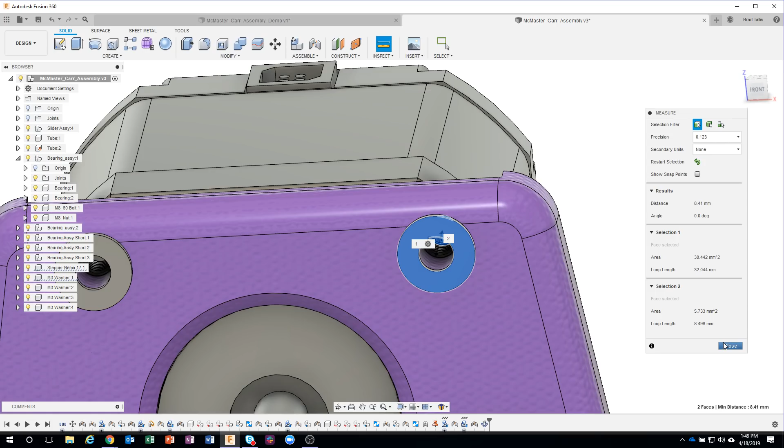Okay, so let's go ahead and remember 8. So I'll come in here and say insert a McMaster-Carr. I'm going to do the screws and bolts - this time I'm going to use a socket head cap screw, just to be different.

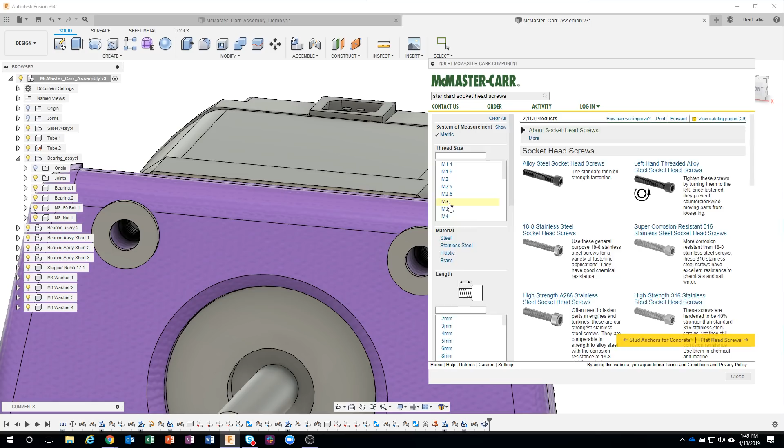Metric, we know it's a metric 3, and we know our length is around 8. So I have the option of 6, 8, or 10. These are all purchasable parts, so it's only going to show me results that you can physically actually get. So I'm going to pick the length of 8.

Again, I have lots of options here. I'm going to go ahead and just do this - let's just do the stainless steel in this case. I'll move this over a little bit so we can see more options. So it's showing me fully threaded, fine, or coarse. In this case, I'm going to do the fine because the stepper motor has fine threads. So I'll go ahead and pick on that.

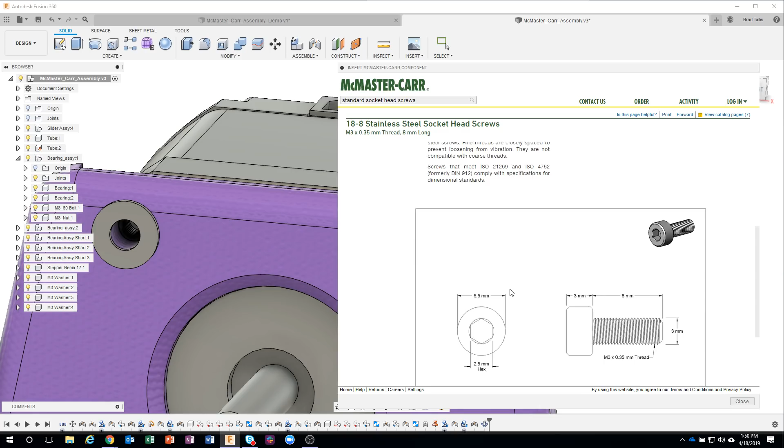Save it. It's going to bring it into my session, and then all I have to do is position it into place. So let's just go ahead and say OK.

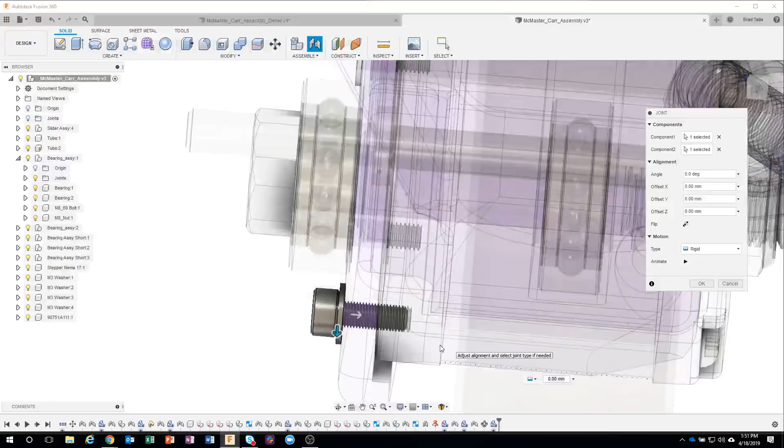I'll create the joint command again, making sure I grab the edge, this outer edge, making sure I'm not grabbing like this point right here. I want to make sure I grab that outer edge, and it's going to bring my screw in there, but again, it's in the wrong orientation, so all I have to do is hit flip. Because we're in this component, we can see it ghosted out. Let me rotate here a little bit. You can see that our screw goes in pretty substantially, but it does not bottom out. So that's why I like using that little measure trick to make sure I'm grabbing the right screw.

And then I'll do the exact same thing again. Let's just do a circular pattern. What's the component? The screw. What's the axis? I'll click that same edge. We'll do 4 of them, and I'll say OK.

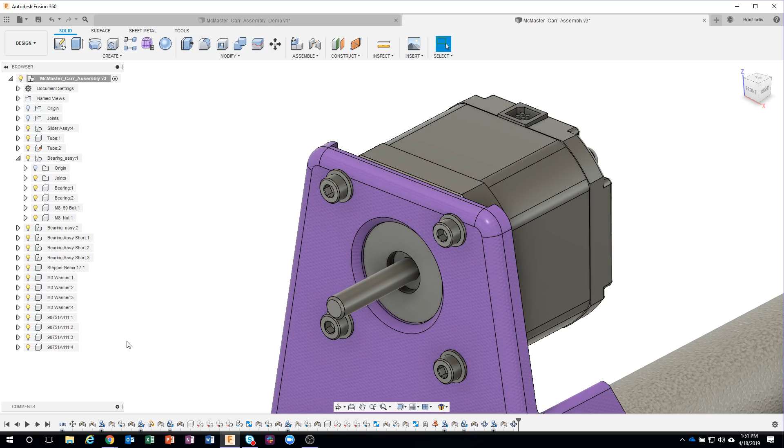However, now I have quite a few washers and screws and stuff like that out here, and I want to organize this a little bit better. So I'm just going to right-click at the top and say New Component. And let's just call this stepper assembly or something like that.

Okay, so I'm going to go ahead and grab the stepper and all of these other parts, the washers and the screws. I'm just going to drag those down into my stepper assembly. And you can see, much simpler now. You can see how easily this is organized, but if I expand open my stepper assembly, here is my stepper and all of my hardware.

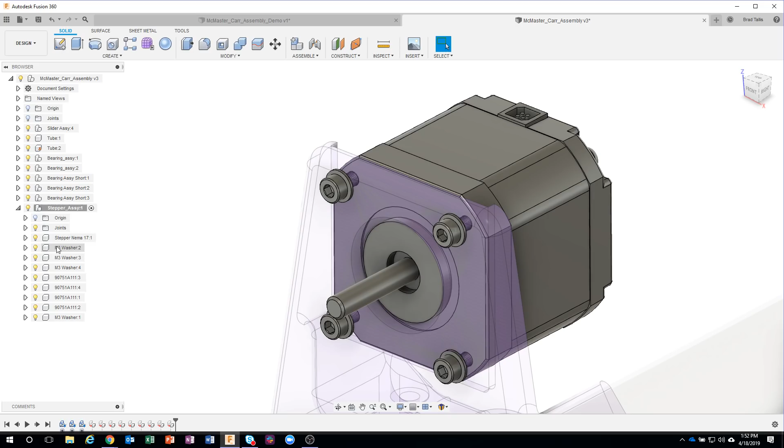And what's neat about this is you can see, for example, I could turn that whole sub-assembly on or off if I wanted to. In fact, let's go ahead and do this. I'm going to activate the top level assembly, and you'll see the power behind this. I can turn that stepper assembly on or off. Same thing with my bearings assemblies. I can turn all of these guys on or off very, very quickly instead of having to do individual bodies or individual components. So I highly recommend that you organize as easily as possible.

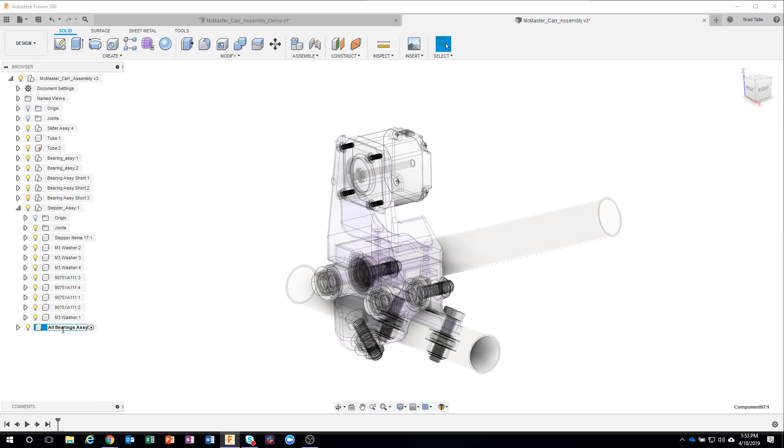In fact, if you wanted to, you could even come in here and say New Component and say all bearings or something like that, assembly. And I could put these bearing assemblies inside this guy, like so. And if I want to, I can now turn off all of my bearings and the bolts and the screws all in one click.

Okay, so hopefully you saw the power of using the McMaster-Carr under the insert menu, where we didn't have to model anything. I didn't have to model a stepper motor. I didn't have to model bearings. I didn't have to download nuts and bolts or anything like that. It's all out in this McMaster-Carr pull down. So hopefully you saw the benefit of that.